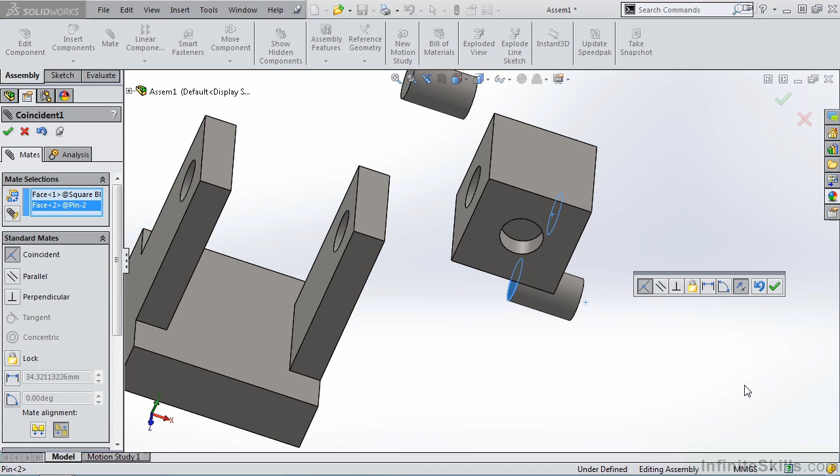Once I select the two faces, notice in the Property Manager, the coincident mate is the one that is highlighted. Obviously, I can select a different one. And I also have a pop-up toolbar, so you don't have to move your mouse all the way across the screen to make changes. I do like the coincident mate, so I am going to select the green check mark.

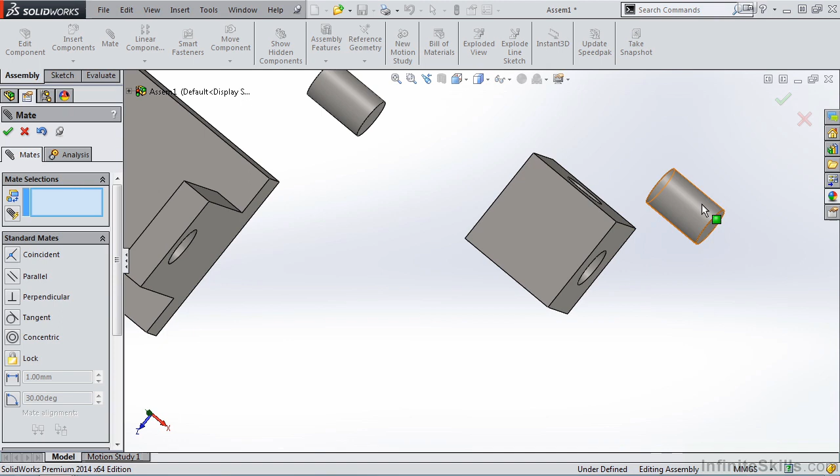Now, as soon as I apply that coincident mate and I go to move the pin, notice both parts are moving. And at first look, it may appear the coincident mate did not take. However, if we look at it from a top view, let's roll it just a little bit more, you will see that coincident mate did take. However, it looks like we need to add additional mates.

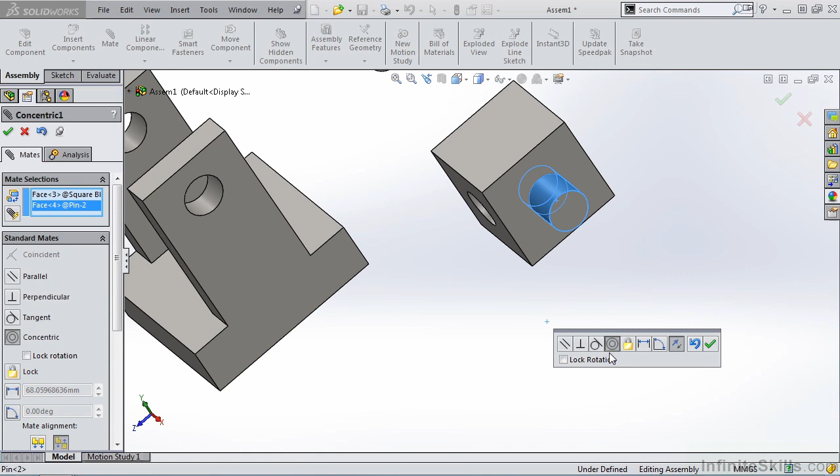Now we'd like to center this pin in this hole feature. Looking at the standard mates, that would be the concentric mate. So I'm going to select the hole in the part, along with the outside of that cylinder. The concentric mate is highlighted, and then I'll select the green check mark. Now, when I go to move the pin, the two parts move together.

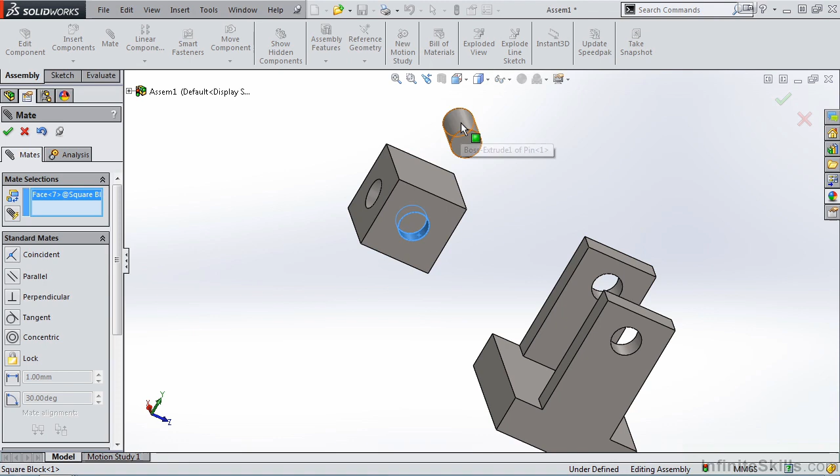Now let's do the same for the second pin. I'll select this face, along with this face, apply the coincident, and then select the surface here. Along with this surface, apply the concentric, and now notice those three parts move as one.

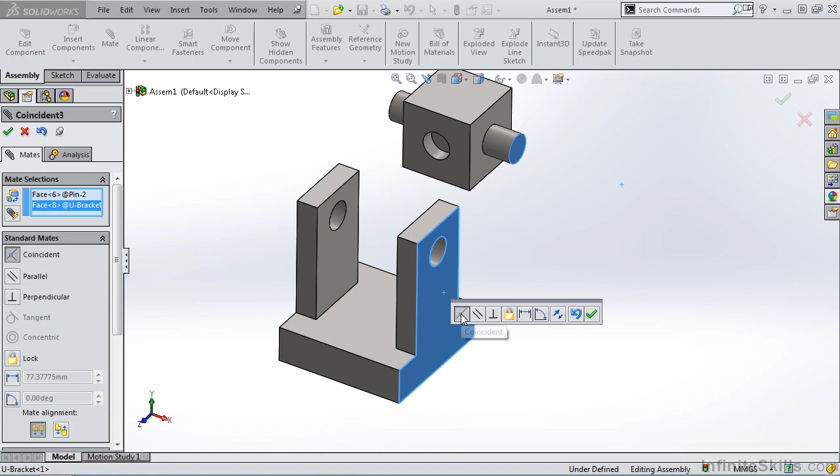Now let's apply a couple more mates to mate these three pieces to the U-bracket. I'll start by selecting this outside face of the pin and the outside face of the U-bracket and applying a coincident mate. I'll then apply a concentric mate and then accept it. And notice if I close out of the Mate Property Manager, the block can rotate.

Now you may want to have that rotation. However, if not, you can simply add a parallel mate between this face along with this top face. Accept it by clicking the green check mark, and now we have a parallel mate between those two faces, and the block no longer rotates.

Now if I close out of the Mate Property Manager, I do want you to notice that we have a mates listing in the Feature Manager design tree. If we expand it, these are all of the mates that we just applied.

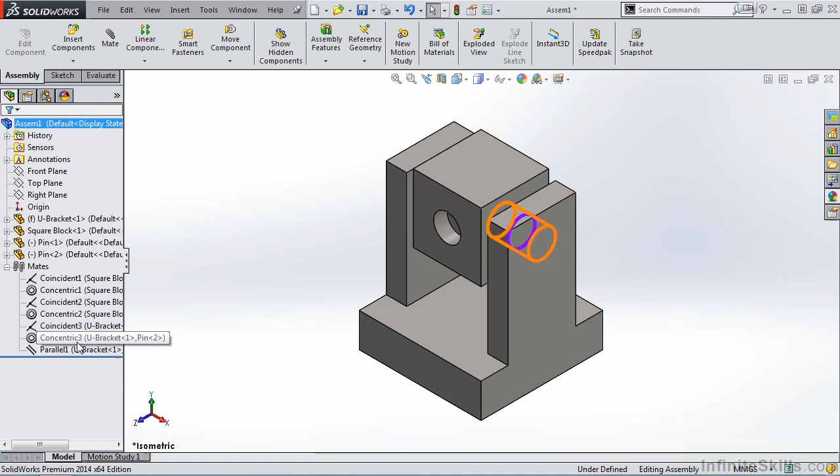Now, at a later time, if you would like to be able to rotate this square block, there is no need to delete the parallel mate. You can simply suppress it. Suppressing the parallel mate grays it out in the Feature Manager design tree. When you go back out to the assembly, you'll notice it now rotates.